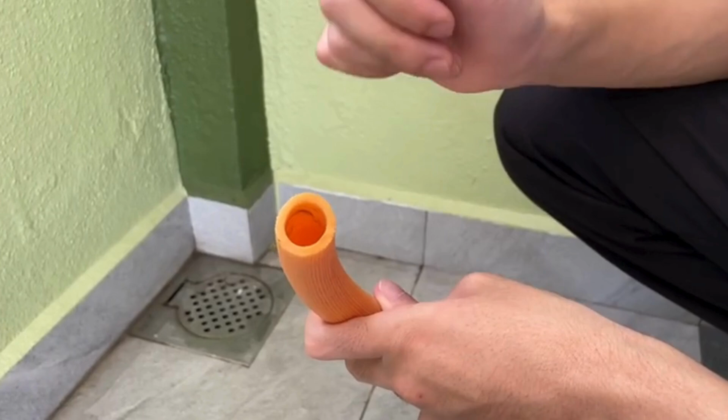Alright, so let's jump to the experiment. In this experiment, we will be using three different techniques. The first one is the 1/4 thumb technique, which means we close a quarter of the water exit area. The second one is the half thumb technique, which means we close half of the water exit area. And the last one is the 3/4 thumb technique, which means we close 3/4 of the water exit area.

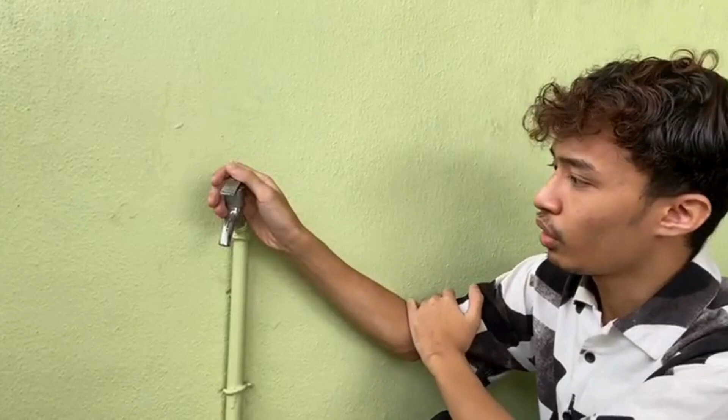Since we are doing an experiment on Bernoulli's equation, it must have a pressure, right? But since we don't have special equipment for measuring pressure, such as a pressure gauge or a manometer, in this experiment we'll only be assuming that the pressure is constant throughout the experiment.

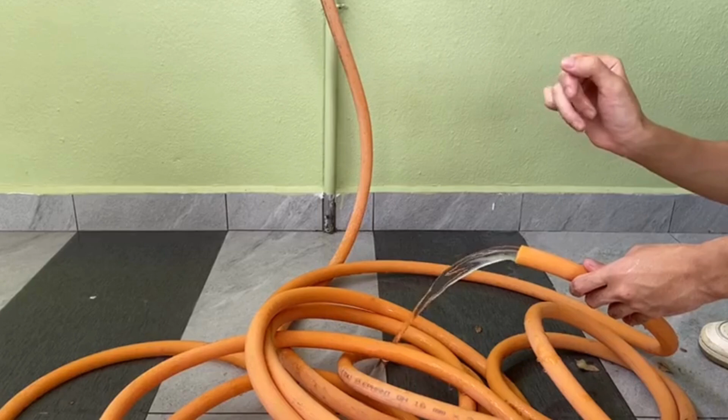Okay, so for the first one, we will be doing the quarter thumb technique. Let us observe the change in the water flow after we apply this technique. Okay, so this is the quarter thumb technique. Spot the difference, right? Okay. The next one is the half thumb technique. I'll close half of the water exit area. The speed of the water increases.

Okay, and the last technique is the 3/4 thumb technique. And we can see the difference, and that's where the Bernoulli equation is applied to this experiment. So I guess that's the end of our mini experiment for our group project, and the outcomes and the calculation for our experiment will be discussed next in our slides.

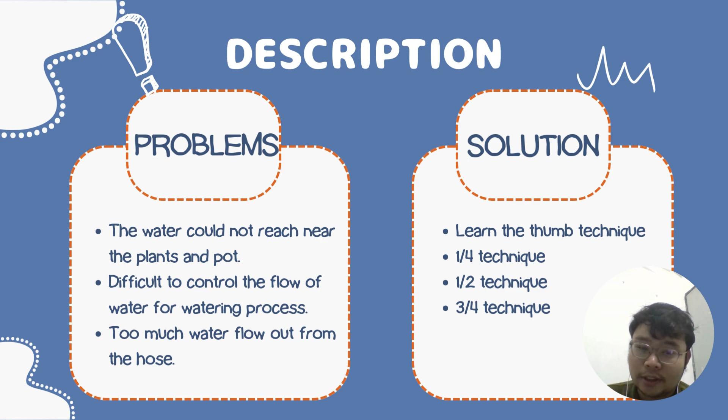Okay, as for the analysis, we know that Bernoulli's principle states that the total mechanical energy of the moving fluid, comprising the gravitational potential energy of the elevation, the energy associated with the fluid pressure, and the kinetic energy of the fluid motion, remains constant.

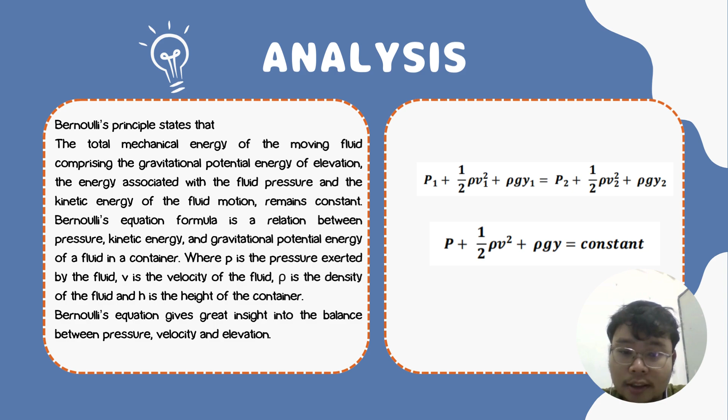The Bernoulli equation formula is a relation between pressure, kinetic energy, and gravitational potential energy of a fluid in a container, where P is the pressure exerted by the fluid, V is the velocity of the fluid, rho is the density of the fluid, and H is the height of the container. Bernoulli's equation gives great insight into the balance between pressure, velocity, and elevation.

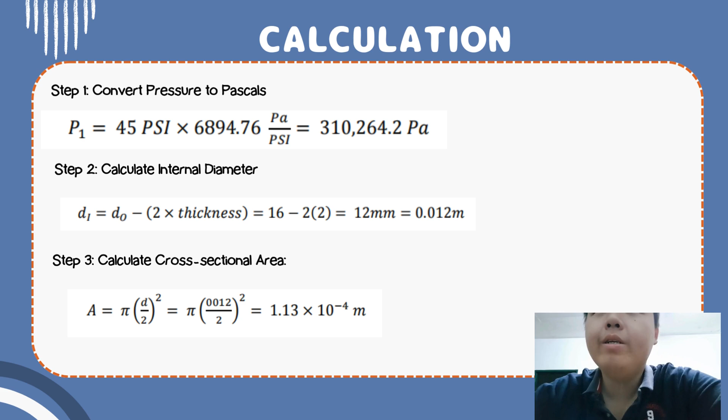The calculation part includes 9 steps. Step 1 is convert pressure to pascals. Step 2 is calculate the internal diameter. Step 3 is calculate the cross-sectional area. Step 4, calculate the effective area. Step 5, calculate the average pressure.

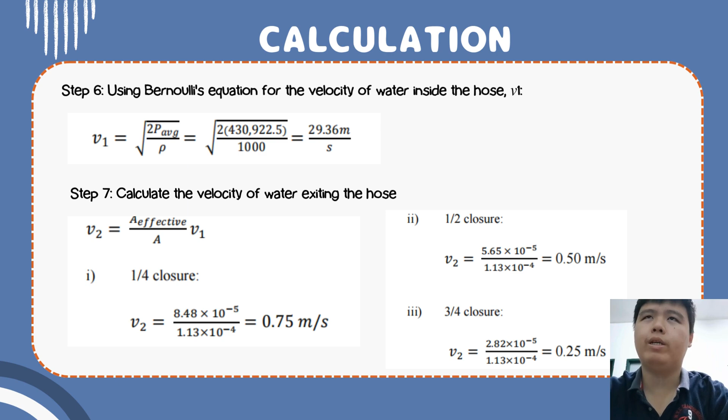Step 6, use Bernoulli's equation for the velocity of water inside the hose. Step 7, calculate the velocity of water exiting the hose. Step 8, calculate the pressure of water exiting the hose. And the last step is calculate the height difference. So that's all for the calculation.

So we came up with a conclusion. We have concluded that these manual pressure regulating hoses are essential and important equipment for a wide range of sectors and uses. Their combination of robustness, adaptability, and affordability allows them to facilitate effective operations in challenging environments.

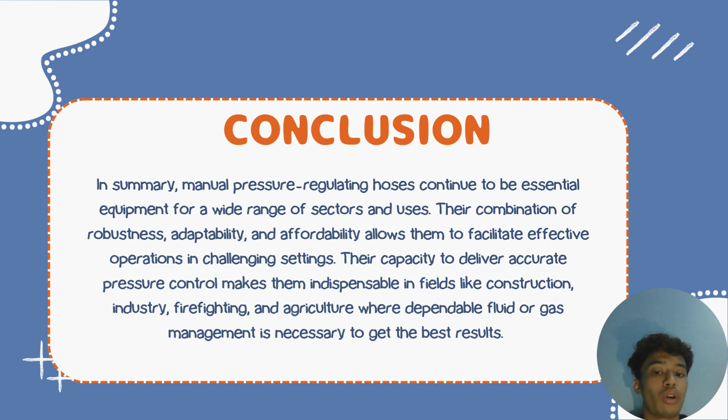Their capacity to deliver accurate pressure control makes them indispensable in fields such as construction, industry, and also agriculture, where dependable fluid or gas management is necessary to get accurate and the best results.